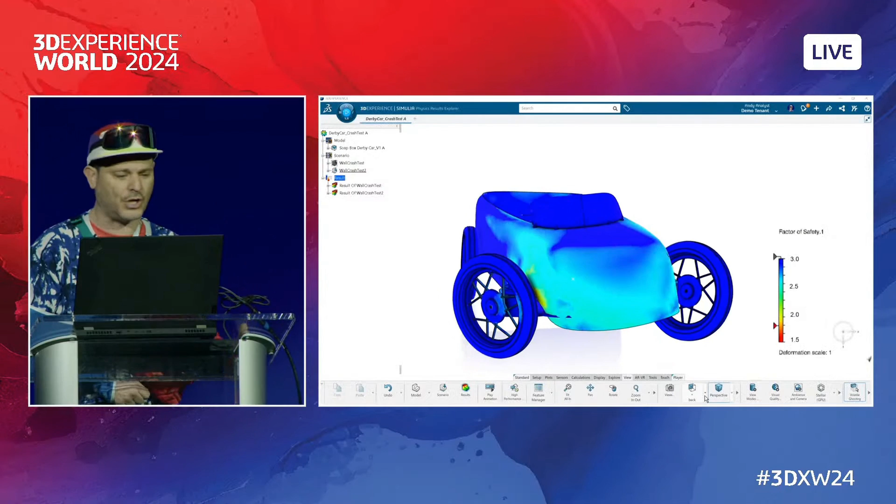From what I simulated, nothing predicted the crash response. The frame and my results, they were totally solid. Now, what did you mean were solid?

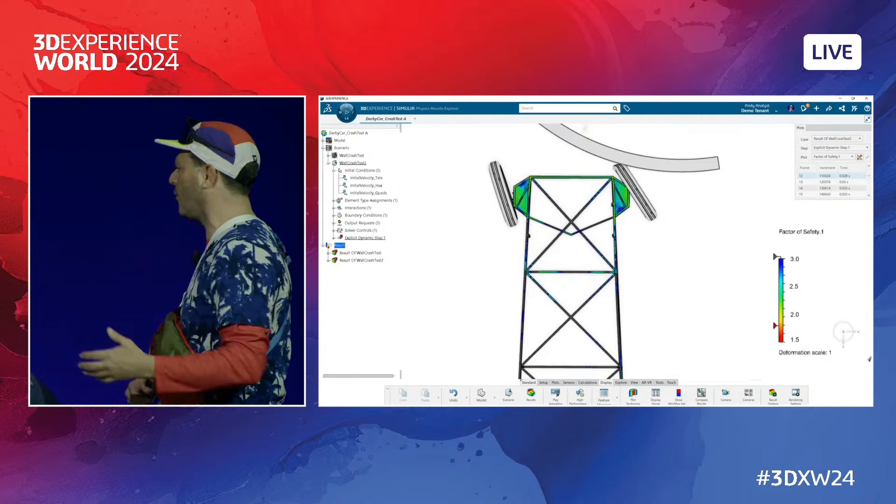Well, they were until Eric made that last-minute revision to the front end, and I didn't have time to run the studies all over again because my laptop is older than Eric's tie. I put in 6 IT requests for a new machine, and they denied them all 6 times.

But now, what about the cloud? Surely you got credits or tokens so you could use that solver. Oh, well, that's a great idea, and Mike was supposed to order some, but they never showed up.

Hold up. I was tasked with lightweighting the front end and making significant changes at the last minute. How could we not validate them? Now, son, hang on a second. You said significant and last minute. Now, Eric, that's never a good recipe for CAD casserole.

Not that I need Andy's validation, but let me just show you what I did. I remember it like it was yesterday.

This task says to lightweight the frame. I thought heavier cars were faster, but hey, I'm not the project manager here. 38 pounds, this is gonna be easy with SOLIDWORKS 2025.

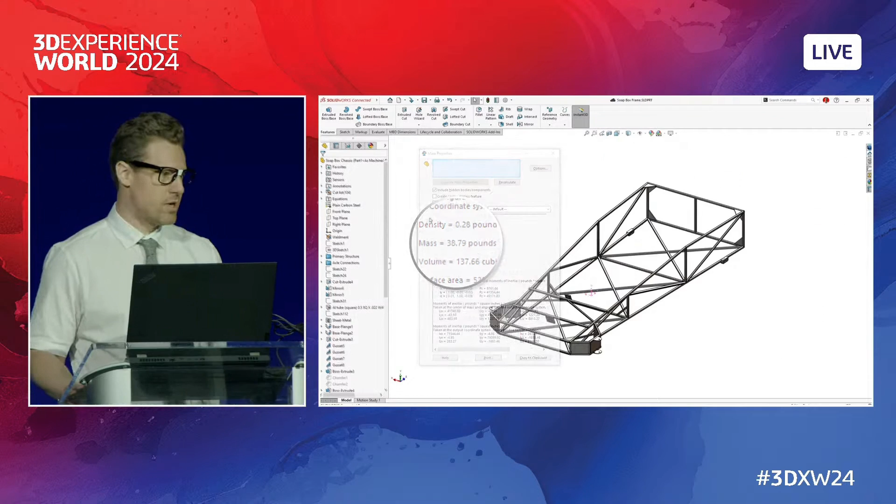I'll just drop in one of my favorite blocks on this plate, and I hate it when the sketch color matches the material. With 2025, I can change the color from the right-click menu. Now I can see it even without my glasses on.

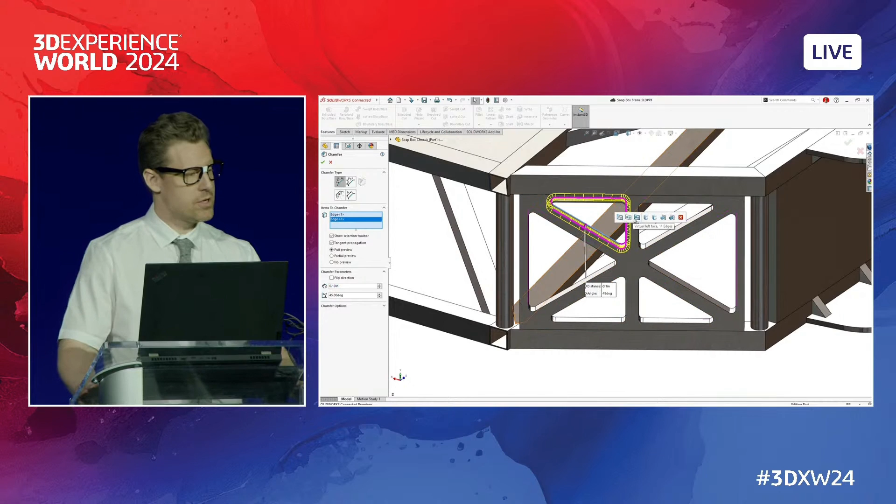This is a good start, but I can do better. In SOLIDWORKS 2025, the chamfer tool adopts the selection shortcuts from the fillet command. That was quick. Ouch, these sharp edges might injure Andy's delicate rock climbing legs.

In my new version of SOLIDWORKS, I can round them off, even though they are 2 separate bodies. Nice, bro. I'll use assembly visualization to check my work.

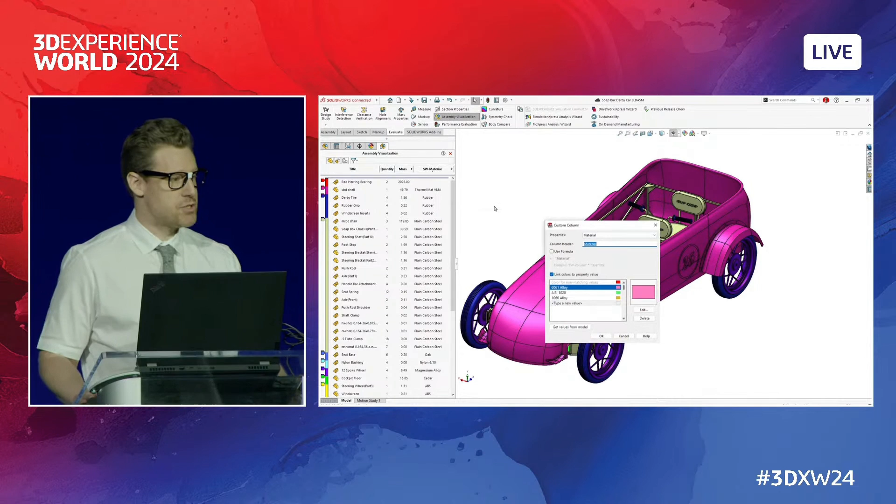In SOLIDWORKS 2025, I can assign specific colors, which makes it easy to see which components have no material applied. Sorting by mass, I can see that I've reduced the weight by 20%.

Now, what's that there at the top? It looks bigger than a Texas sunset. Wait an inch, pound second. This component is massive. I'll use the new roll-up feature in 2025 to isolate it.

Red herring bearing. Who did this? Mike, have you been in my metadata again?

Wow, that is a lot of drama. There is a lot of drama on this team, but also a lot of great demos. And we are going to see them again tomorrow for Act 2 of Splines Out. So I hope you'll be there.

Wise up, everybody. Whoa! 1 million views overnight of the Extrudo Cup fails coverage? Chad thanks you all. I saw Ben Lofton commented, what's up with the Extrudo stock price this morning? Up 10%? There goes all shorts.

Well, Ben, that's the power of social media, and that's the power of Chad. What's bad for MVP Corp might be good for Extrudo. Just take a look at those tickers.

And now, Eric, would you be able to use some of those fine SOLIDWORKS skills you're always talking about to help us investigate further? Sure, no problem, Rhaegar. That red herring bearing just doesn't make sense. Further proof that I'm being set up. And if someone has tampered with our car, it will definitely show up in the assembly drawing.

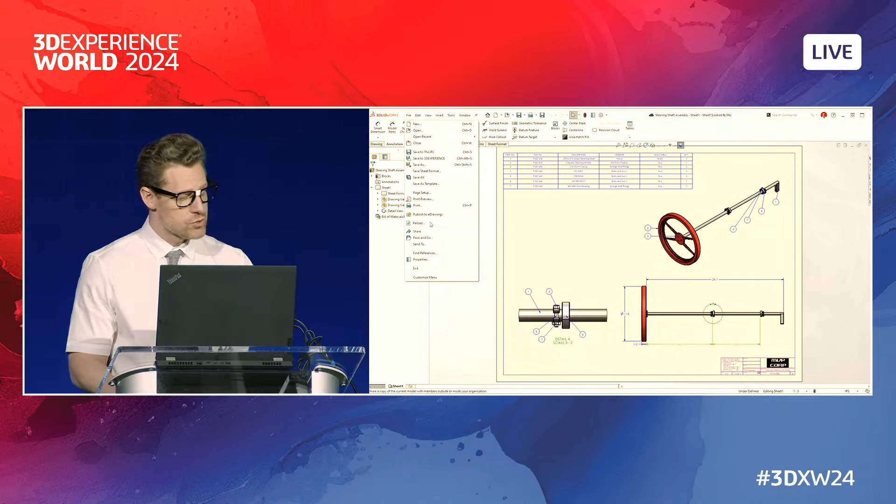Oh, dangling dimensions? Well, maybe a quick reload. SOLIDWORKS 2025 now offers the ability to reload a drawing document, just like with part and assembly files.

Okay, but that didn't solve these danglers. With 2025, this is no problem. You can highlight any dangling dimension and use the new automatic repair tool to reattach. This also works for sketches as well.

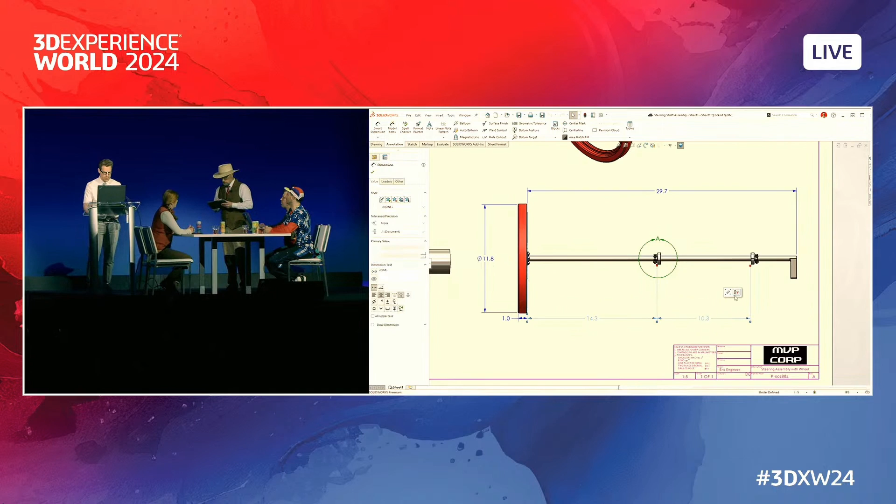Maybe this detail view will have some clues. Yes, this is interesting. A display state for a red herring bearing? There it is. Are these bearings reported in the BOM?

Let me check the reference configuration. No, this is wrong. No wonder we didn't see it before. Someone has definitely been tampering with this.

Check this out, Bernard. In 2025, you can now filter and organize your bill of materials by configuration and display states. As great as that capability is, this drawing smells really fishy to me.

So there are design changes by Eric, lack of validation by Andy, and a drastic update to the product structure by Mike. Suspicious, quite, but do any of these constitute intentional sabotage?

Who's ready to really ramp up this lunch and learn? Extrudo just released its holiday surplus pomegranate. I've got quantities. Anything but weld mint.

Ugh. Pomegranate? I suppose. Listen, Mike, adding that red herring bearing, that's one thing. Haha, right? But modifying the frame, that could have easily caused our crash. Yeah, and I definitely didn't run sim on that.

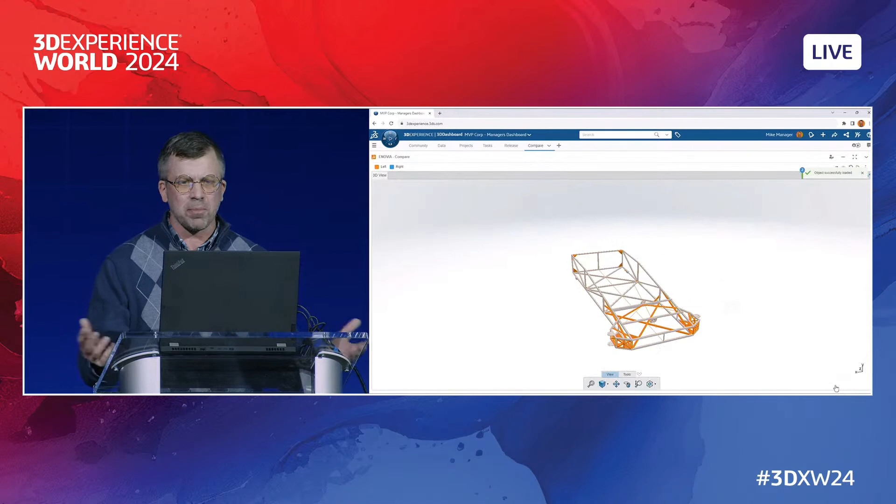Uh-oh, this doesn't make any sense. It's showing me as the owner, and I can't even remember the last time I actually opened SOLIDWORKS. No way I did this. All of the structural support on the front end has been completely undermined.

Eric, this is below par work. Definitely not approved. No way. That's not how I would have modeled that at all. Well, then, you wouldn't be opposed to showing us how you would model it then, would you?

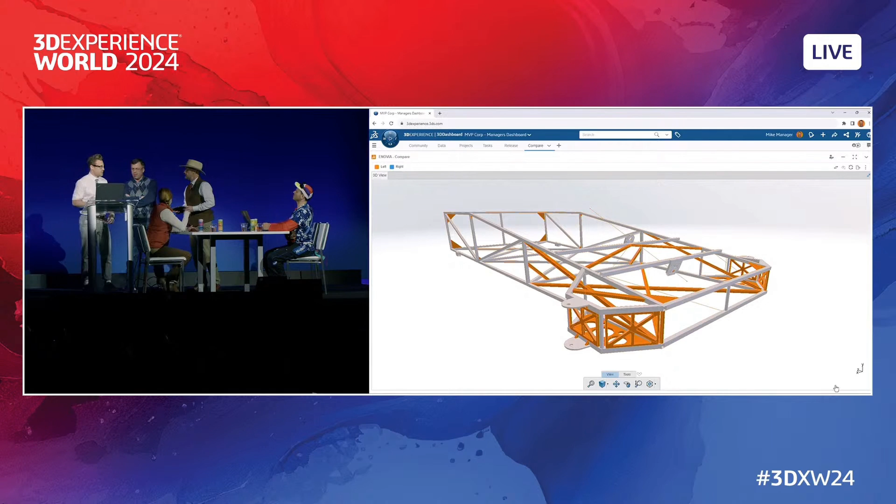I just so happen to have a branch with my superior design right here. Now, I prefer to use structure systems instead of weldments. It's easier to use and update. Instead of 3D sketches, I use simple solid and surface geometry, or even planes.

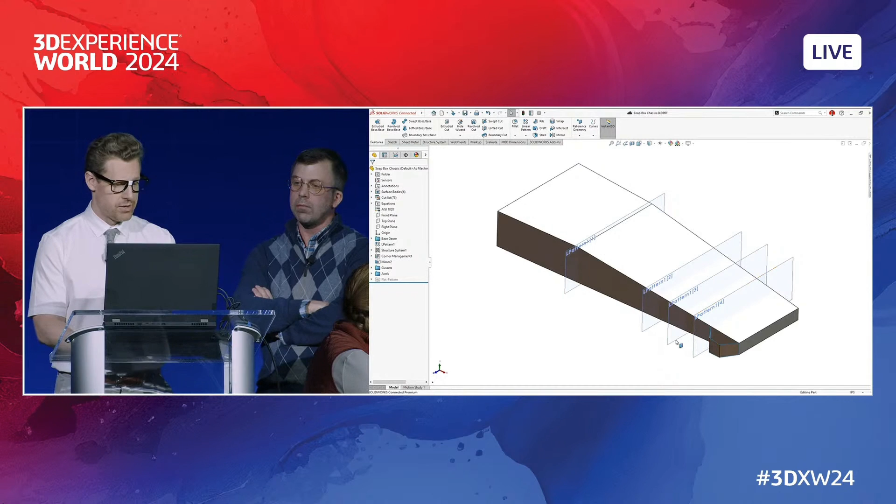You guys are all gonna love this. Setting up these planes was easy now that you can pattern planes and axes in 2025. Even better, you can now specify instances to vary as an offset from another instance rather than having to calculate the distance from the seed. That makes a lot more sense in this context.

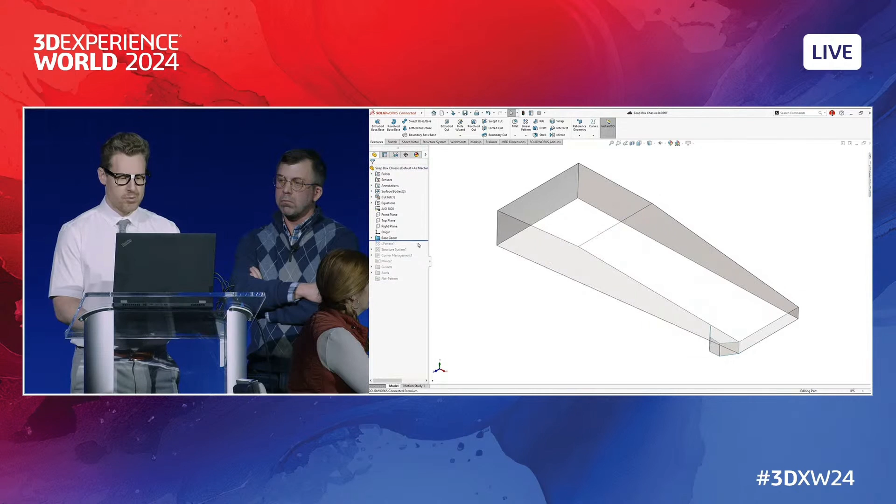And look at how clean this feature tree is. I started with my base geometry and used that to create the frame. I added some gussets for strength and a brand new front end design. There's still some work left to do, but I think this is a solid start.

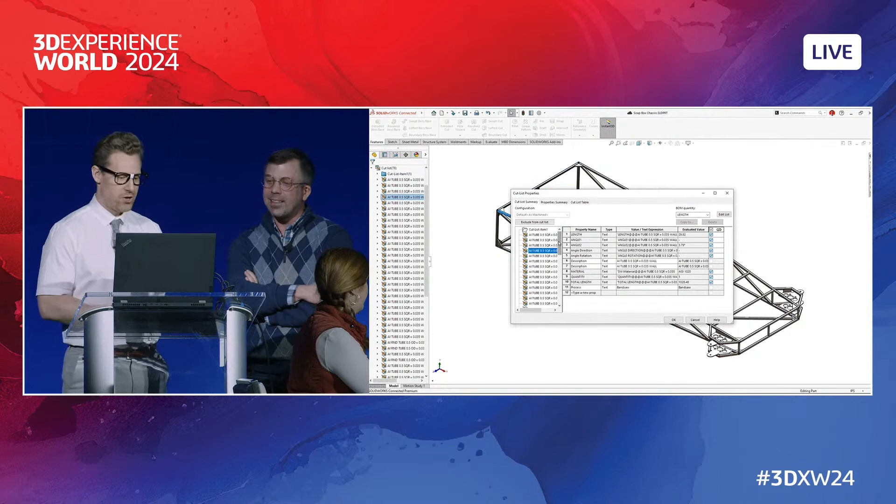Now, Mike, I know how much you love your properties. It seems obvious to me that these members are going to be cut on the bandsaw, but I'll add a property just for you. In SOLIDWORKS 2025, I really don't mind since copying cut list properties to all items is now possible. This saves a ton of time.

These sheet metal components aren't going to be cut on the bandsaw though, so let's change that for these 4 items with a quick overwrite. You got to give me mad props for that one, boss.

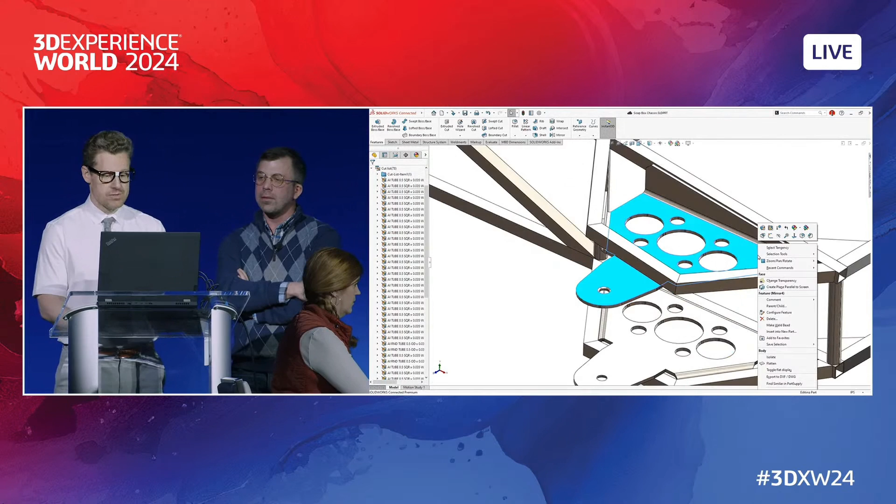This sheet metal part is almost complete, but I've been struggling to communicate my bend areas to the shop. Not anymore. With SOLIDWORKS 2025, I can add bend notches to the flat pattern, so it's easy for them to line up the part in the press brake.

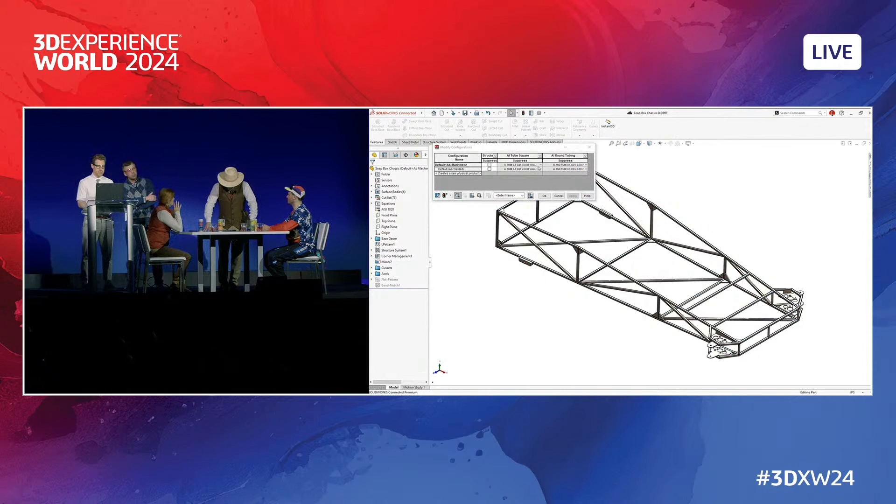And don't worry, Andy, I've got something for you too, and it just so happens to be my favorite feature in 2025 so far: the ability to configure the structure's profiles. This makes it a snap to create different variants for your FEA analysis. You won't need to rappel down from Analysis Mountain to bother us lowly designers anymore.

That is quite the speedy design work, Eric, but it's hard to tell just by looking if your new design is better or worse. Reynard, I got this.

Move. Dude, there's no way that your design would have survived, and I can prove it. Let's see if it can withstand what we throw at it using SOLIDWORKS simulation.

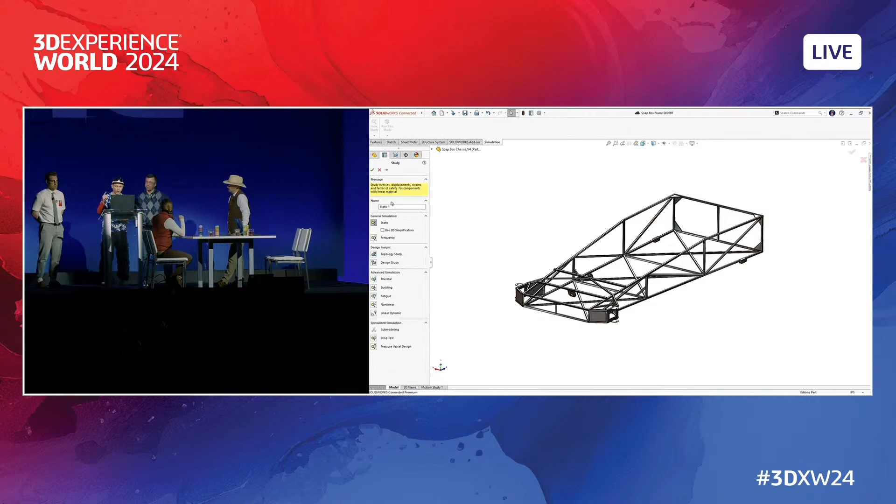I'll make this simple so even you can understand it. Notice how the structure system geometry automatically becomes a jointed beam model. First, I'll add some fixtures where the wheels and suspension meet the frame.

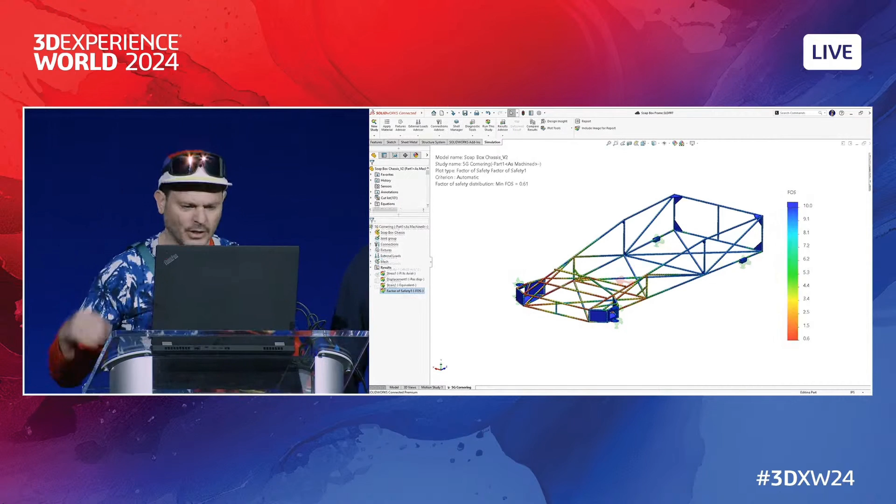And now for the loading. These are high performance machines, so they need to withstand 5 Gs of side loading when cornering. Now let's run this linear static analysis.

No way, that's even worse than I thought. Red is bad, Eric. Minimum factor of safety is 0.6. That's a total failure, bro.

You're still not convinced, huh? Okay, cool. Well, let's see how this thing responds to harmonic loading. To save time, I'll copy my study to a dynamic analysis. All my fixtures and connections go along for the ride.

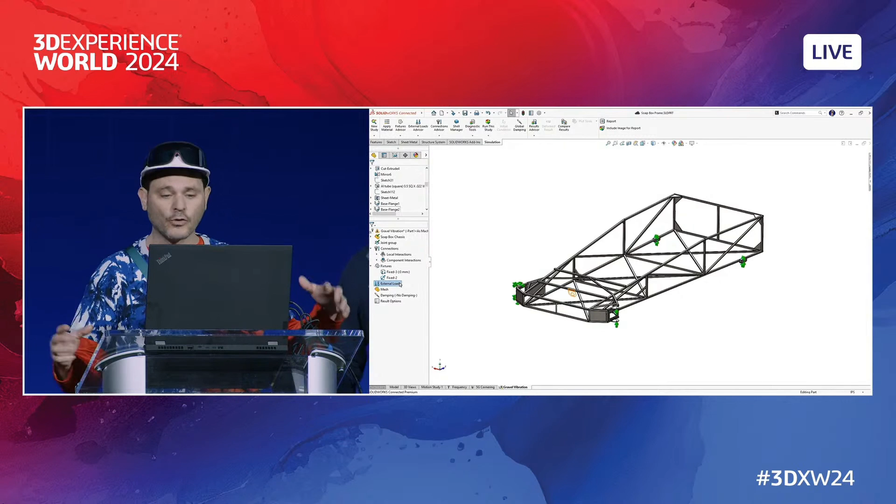Now to add a base excitation. Rolling over gravel at high speed creates vibrations typically between 50 and 100 hertz. And now, in Simulation 2025, I can specify those areas on the response spectrum. That means additional harmonic mode shapes right where I need them.

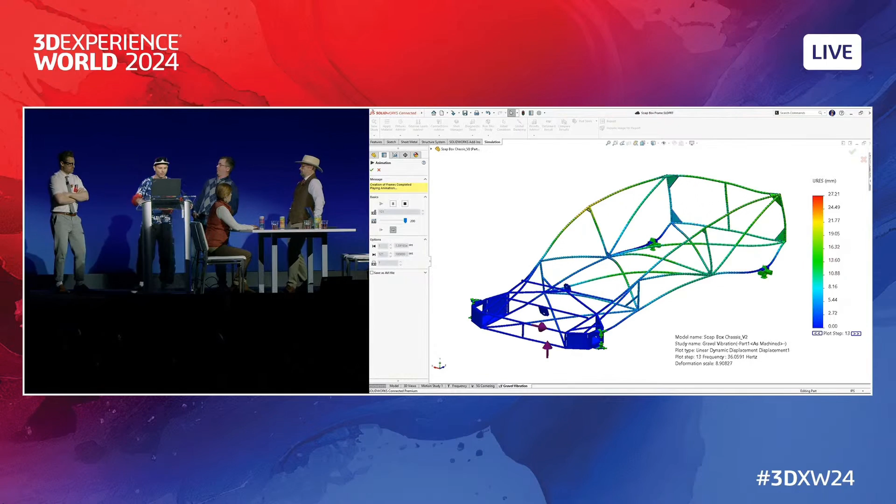Oh, well, look at that. It's Galloping Gertie. With that type of frame deflection, you'd lose all steering control. That's interesting, since that's exactly why we crashed. But we were totally thrown from this car, bro.

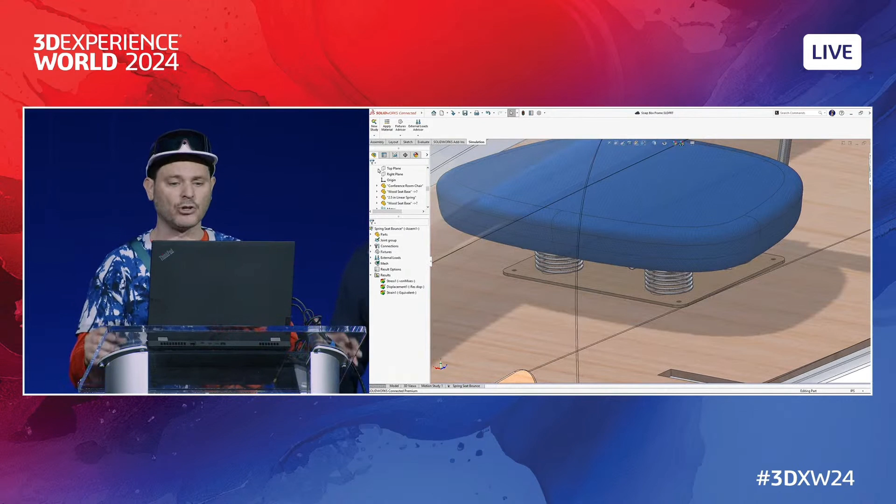From the harmonic response, we get a pretty good idea about what would happen to us if we were riding in it. All of the chairs are connected to the floor with springs. To accurately represent them, I'll use the new Abaqus-powered orthotropic spring connector. With Simulation 2025, not only can I control the axial stiffness, but also the directions of lateral, torsional, and bending stiffnesses as well. All right, and run.

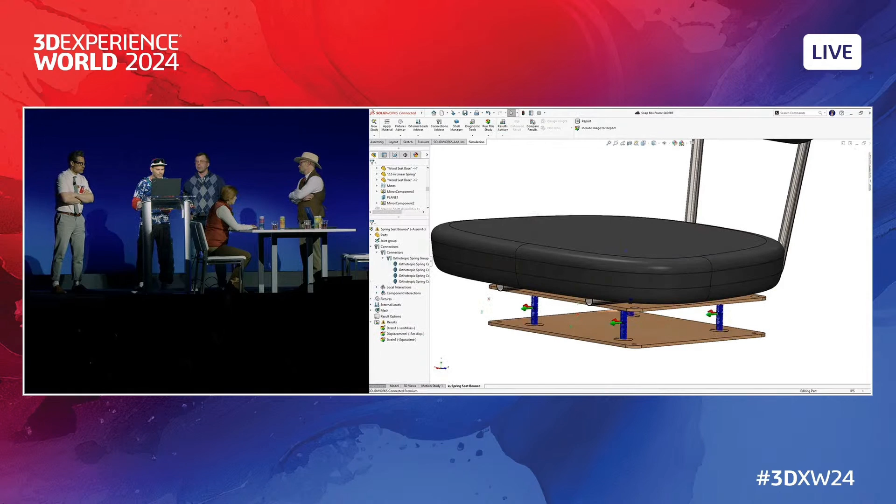Wow, your new frame turned our chairs into ejector seats, bro. And don't think I missed this result. The fundamental frequency corresponds exactly to my cornering speeds.

What's going on here, Eric? Have you been spying on me at the track too?

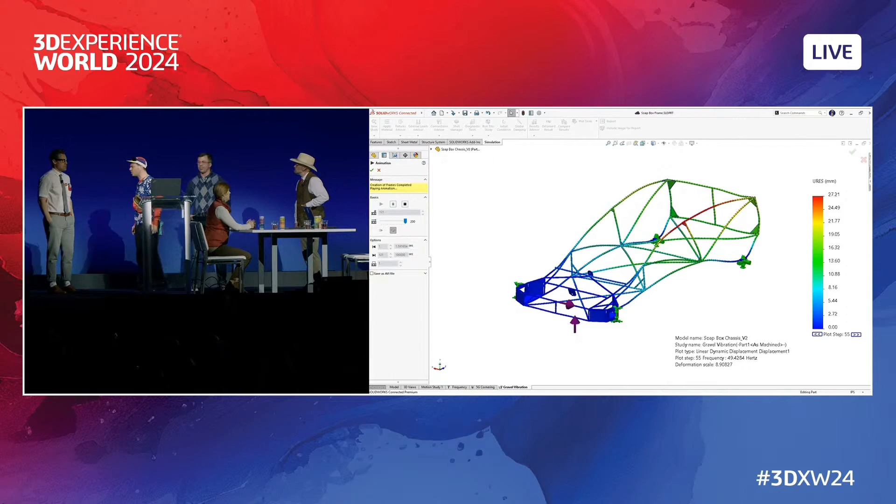The frequency has to be a coincidence. I can't imagine that anyone is down at the go-kart track meticulously clocking each of Andy's lap times. Well, I wouldn't be surprised if I did have a fan club, but regardless, whoever changed the frame, they're the ones responsible for sabotaging us and breaking my belay arm. Your arm is fine. Almost breaking my belay arm.

It still hurts. Okay, let's circle back. Whoever made the change to the primary structure assembly and the frame, well, it's got to be one of us. That change, as you call it, that's not at all what my feature tree looked like. It couldn't have been me.

Yes, but it is possible that you modeled it in such an amateur fashion so as to throw someone off the trail. Well, you know, it definitely wasn't me. I'm much more of a mesh and run what I get kind of dude.

You know, there's only 2 of us who have permissions to approve the final route stage to get it released. Maybe we're overthinking this. Someone, not saying who, got ambitious in his lightweighting and didn't rename his feature tree. Someone else released a new revision before, who could it be, that could resolve the backlog of geometry changes.

You know, Reynard, I think these are good lessons learned for the team as they get started on next year's car.

Brenda, a tempting conclusion that chalks this up as overhead of a typical team, but frankly, I think this team deserves a lot more credit for how proficiently they use SOLIDWORKS and 3D Experience.

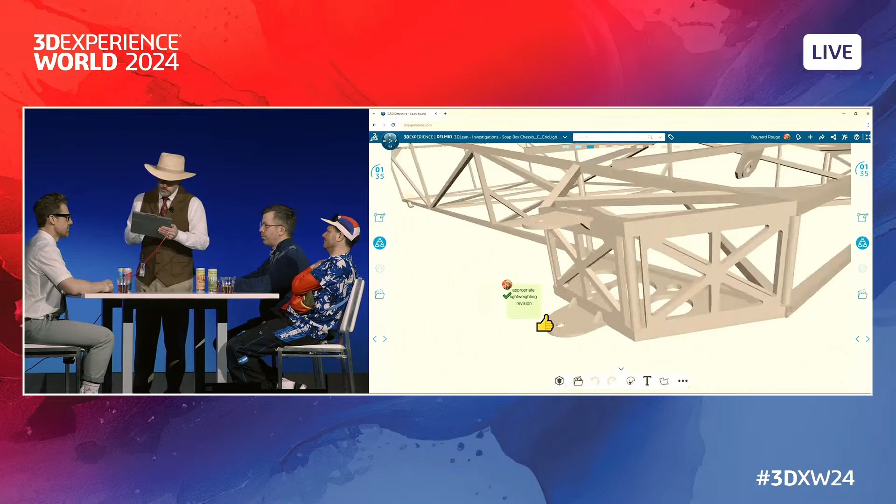Elk, we all agree your initial lightweighting into the front end is fine work. Did you go too far and undermine the structural integrity in another revision? I will say Elk certainly appears surprised by the crash. In fact, from the outside, the final car doesn't look sabotaged at all. Perhaps no one knew what he was stepping into on race day.

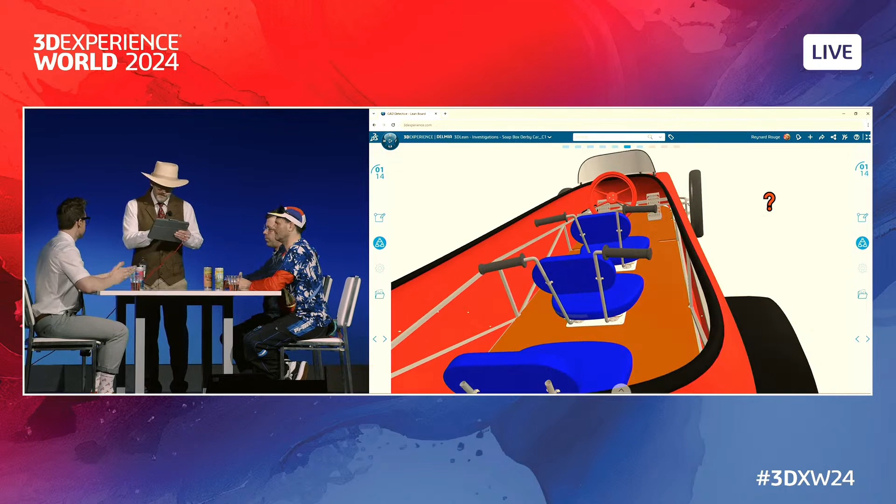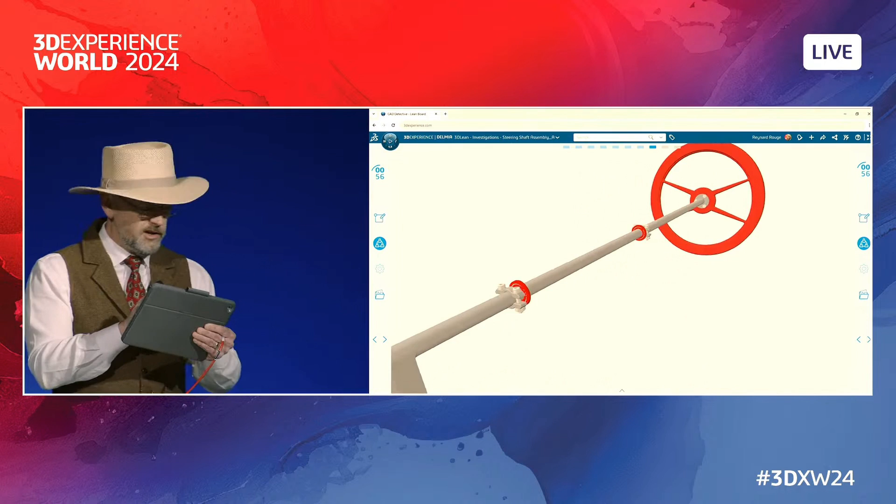Trying to outfox Reynard behind a thicket of branches and merges. Already, we have more problems here than a hunting dog has fleas, but let's just cut to the chase. Who changed the structure and who approved the release?

And what are we to make of this Extrudo stuff? This goes way beyond the crash at the Cup. And as always, these influencer channels, y'all been following Chad? He's speculating that MVP, Extrudo, and the masked billionaire are tied up in this all together. MB, one and the same as my employer.

If only we had more time. Alas, let's just bring this home and answer the most immediate question with the simple drag and drop of the product structure here to the place, and we're gonna...

Excuse me, sorry, Reynard, but this just arrived. It's virtually cold, carbonated, and still in beta. They gave me an entire keg of the new sweet and sour.

Sweet! Brenda's got the Extrudo R&D hookup. Does anyone know how to tap one of these? I'm the beta tester around here. No, I can handle it. I got this, bro, you just get the cups. I already... No, I want this. No, time out. I feel like... Freeze!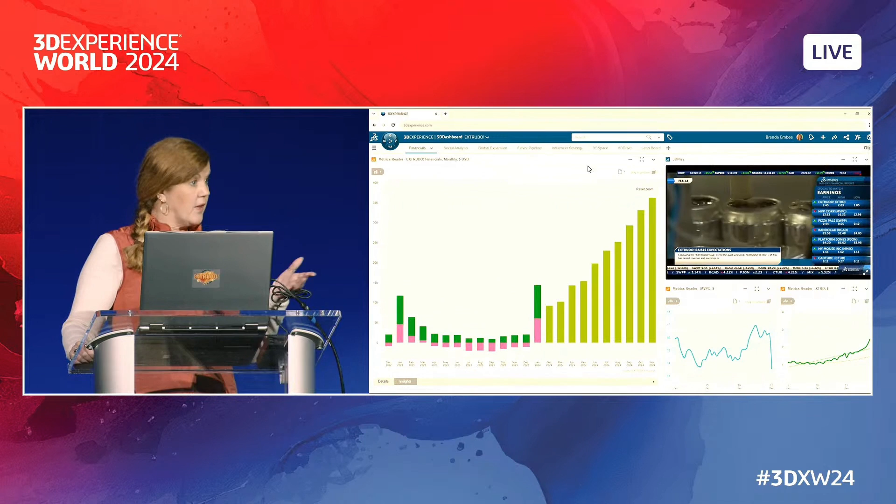There are tailwinds helping us here. Semi-sophisticated consumers, like you three, are tired of big beverage. Global sentiment on caffeine is at an all-time positive, and regions like Northern Europe are especially peppy right now.

In April, we're breaking ground in Belize. We'll be serving every designer around the globe and around the clock. With my factory layout already complete, there might even be enough room for quality control this time. But guys, seriously, this investigation is blocking my critical path to expansion, and I hate breaking a dependency.

How about the new flavors in our pipeline? Rainbow Crash - with flavor like this, we must be living in a simulation. Fillet Fruit Punch, a well-rounded and perfect finish to everything. Lemon Live, tart yet sweet. Sub Delight, sculpted around virtual oranges.

And what's the most critical component of a plan? Social media strategy. The Cup was always the focal point for this. We would get massive coverage of the brightest minds competing in a well-hydrated engineering nirvana.

But that's not how the real world works, is it? No, it was the video of the fails that went viral each year. Luckily, this did miracles for our brand awareness. And you three were always crowd favorites.

We've revamped our influencer program and signed channels like Crazy Cad Kevin, Sheet Metal Sharon. If you aren't following them, your kids probably are. And this year, we break out of the Danny Dozen Cans demographic. Soon, we'll be on tap in every client boardroom and reseller office across the globe.

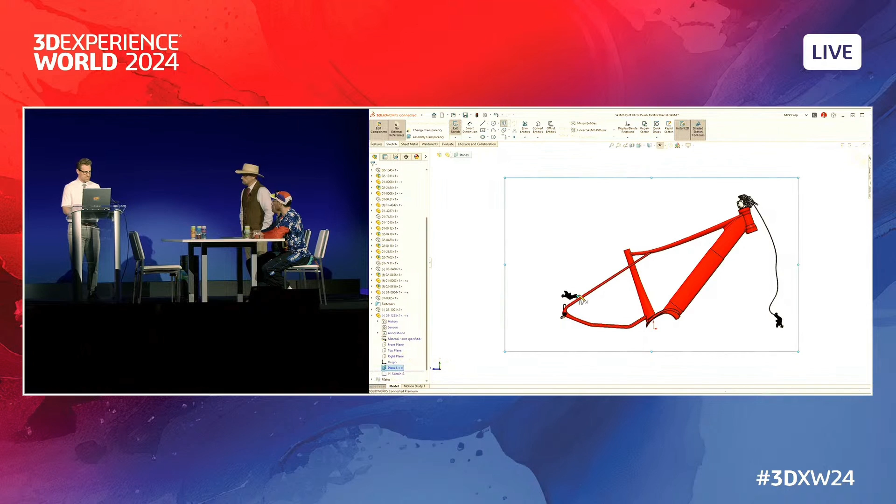This e-bike assembly needs to have an accurate representation of the hydraulic brake lines. In the past, starting with a 2D sketch would have left us with an inaccurate path and incomplete connections. Soon, users can convert 2D sketches to 3D with a simple click.

Modifying this path is even easier than before. The sketch triad can now be activated on spline points with a double click. This really streamlines positioning complex 3D splines.

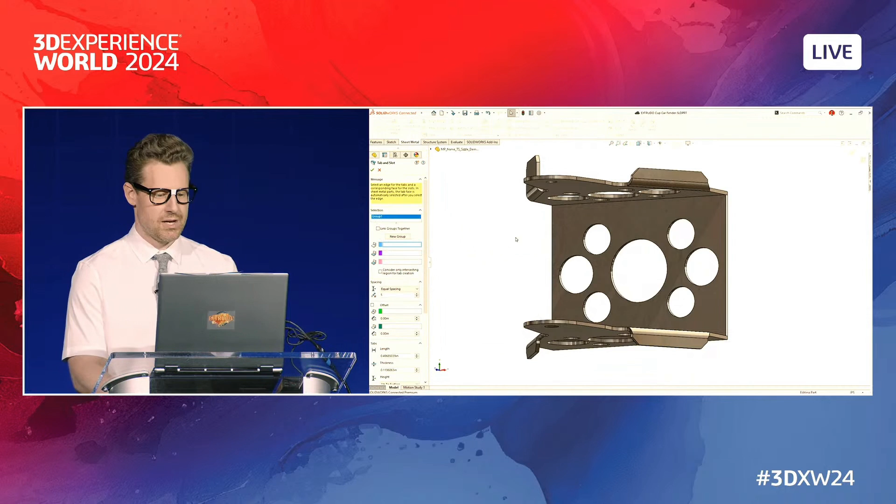Tab and slot design means more simplicity and precision for the shop. Not only is the UI simplified in 2025, but there's a new spacing option that will align your slots to the center of the edge, allowing you to build your tab and slot system from the inside out.

SOLIDWORKS has long offered multiple options for working with large assemblies. One that I use the most is Large Design Review, or LDR. In SOLIDWORKS 2025, more capabilities are available when using LDR, for example, breadcrumb navigation, which makes it super fast to pick the right component.

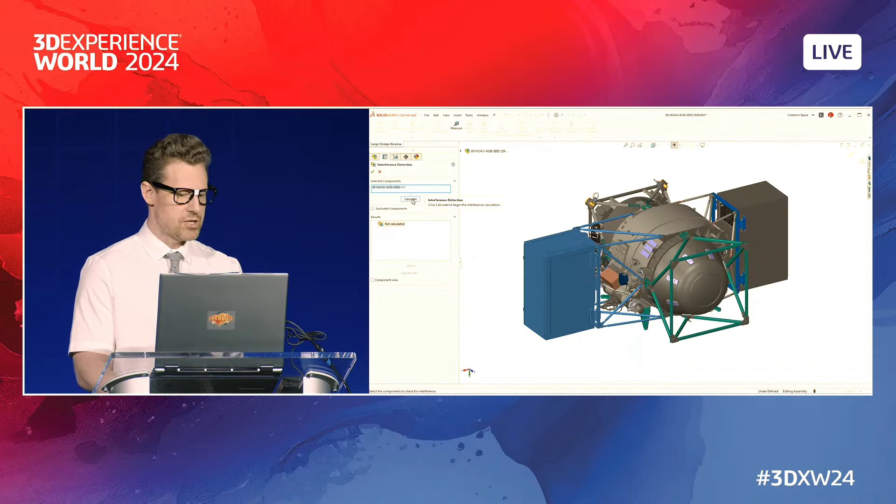2025 expands LDR further. How about we run an interference detection to scan for overlaps? I've pre-selected a subassembly to run the check. Sure enough, there is an issue with the electrical cabinet and its structure. I'll have to investigate this a bit more.

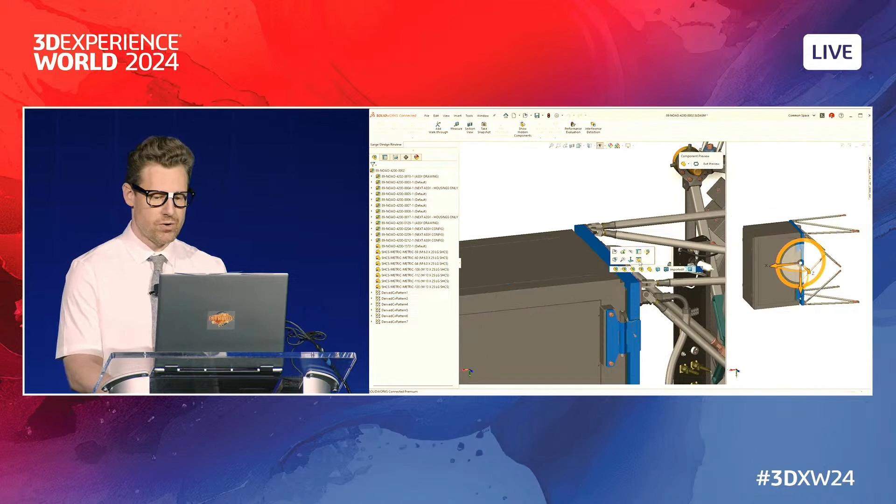Now, in 2025, LDR also supports the use of component preview. This is a side window that gives you a second view to help inspect and modify your design. Here, we can see the issue is with a misaligned hinge bracket.

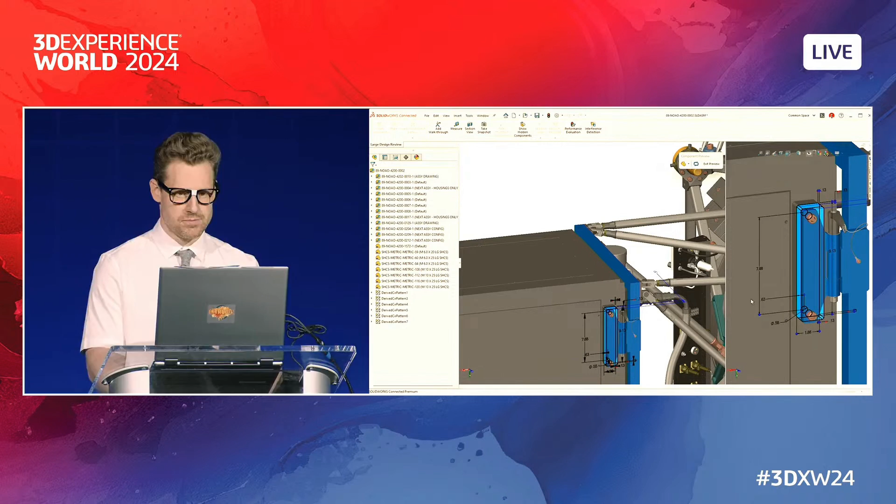No problem for SOLIDWORKS 2025, since in-context edits are available when working in LDR. Editing this part in its underlying sketch is all that's needed to shift the geometry into place. Ah, this looks good. With the changes made, a quick rerun of the interference detection shows the issue has been resolved. If you aren't using LDR almost all the time, you will be with SOLIDWORKS 2025.

Now, let's review some of the great enhancements we saw this week in Dallas. Keep in mind, the development team is hard at work on many more coming throughout this year with each service pack release. I really can't wait for the right mouse menu so I can easily modify my sketch colors.

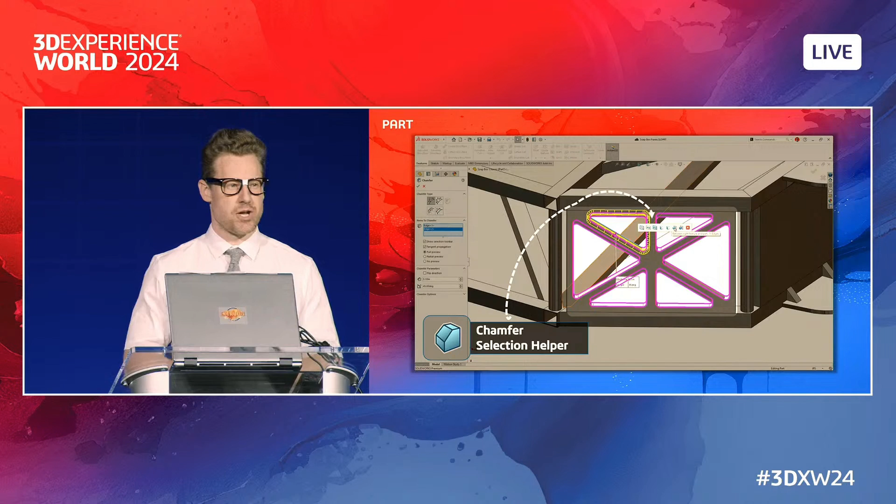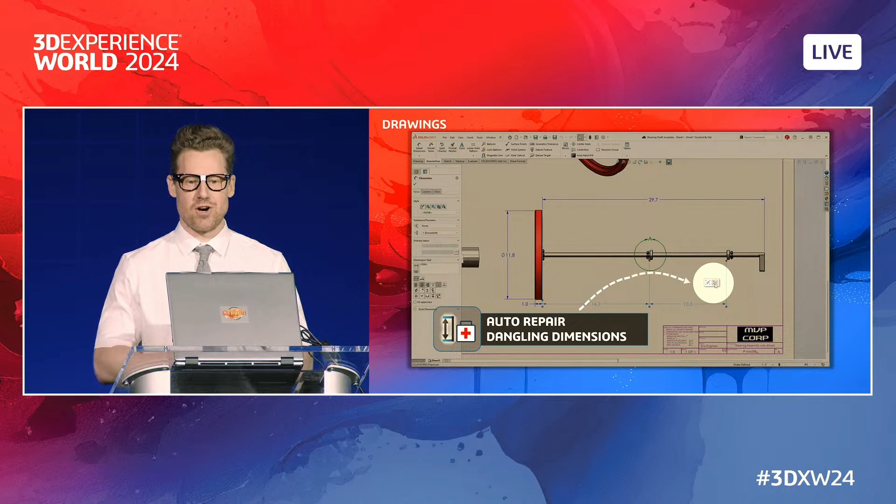Fillets will support multi-body selections. Chamfer selections will include the selection helper. Assembly visualization introduces a roll to here shortcut and adds support for additional property colors. Drawing files will be reloaded on the fly, and dangling dimensions in drawings and sketches can now be automatically repaired.

Bills of materials will offer the option to be filtered by display state. Linear patterns will support planes and axes. Structure system profiles will be configurable. Properties will be more easily copied through cut lists. Sheet metal will introduce bend notches. Simulation Premium will allow users to target specific harmonics in dynamic studies, and adds a new orthotropic spring connection.

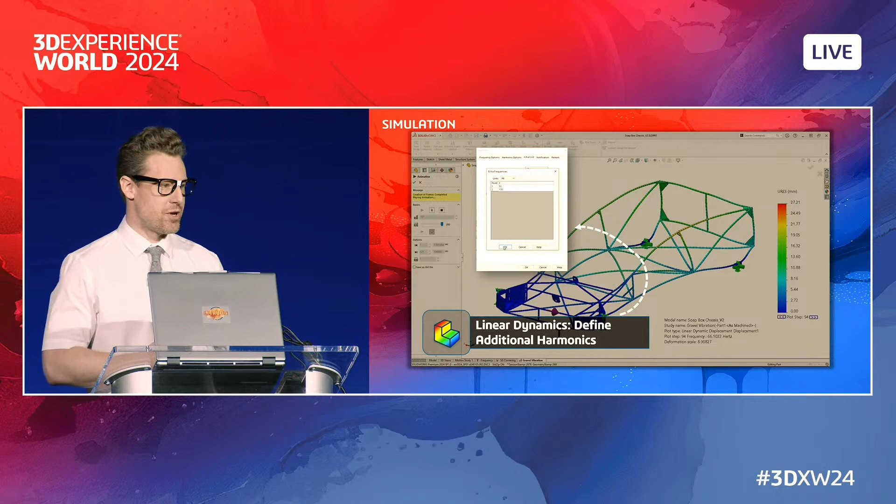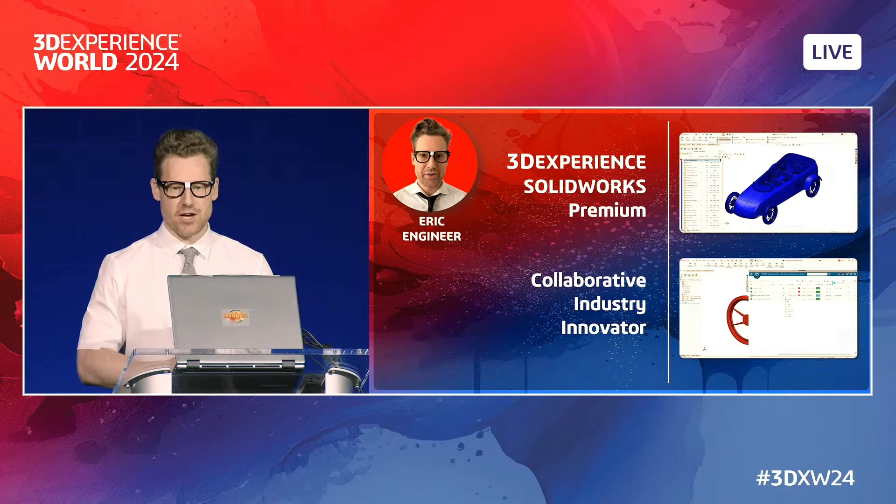Finally, in case you haven't been taking notes, let's recap some of the 3D Experience Works roles the team used this week. I've really started to find a hankering for Boolean Blast, and through the demo, I primarily used 3D Experience SolidWorks and Collaborative Industry Innovator to keep everything organized. Exactly what you have with SolidWorks and cloud services.

Mike, the manager, has fallen in love with pomegranate and keeps an extra jug in frozen state in his desk drawer. Throughout his work week, he relies on Product Release Engineer and Collaborative Industry Innovator. Andy's rock climbing pack is full of Rainbow Crash that he stole from the Extrudo R&D lab. To get his job done, he relies on Structural Mechanics Engineer when the going gets tough, and of course, SolidWorks Simulation Premium.

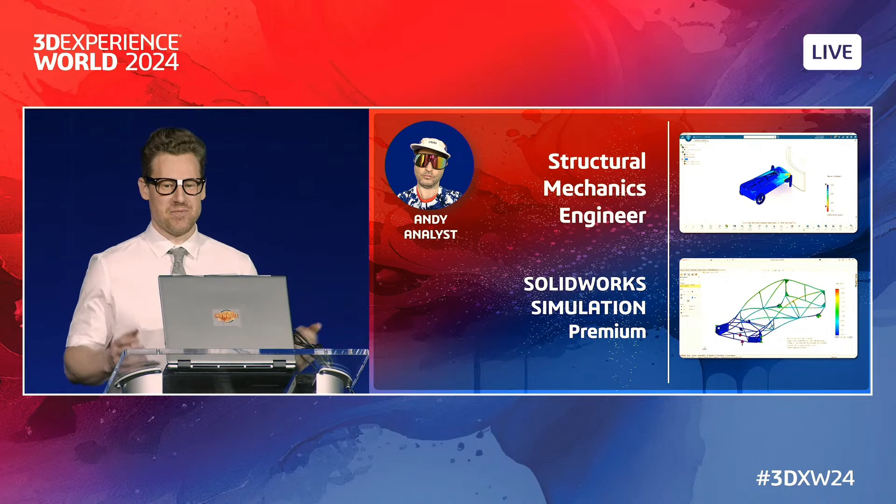Reynard Rouge keeps his thirst quenched with a cold, sweet feature tea, fitting for a Southerner. Throughout the week, he kept track of all of these clues with Lean Team Player.

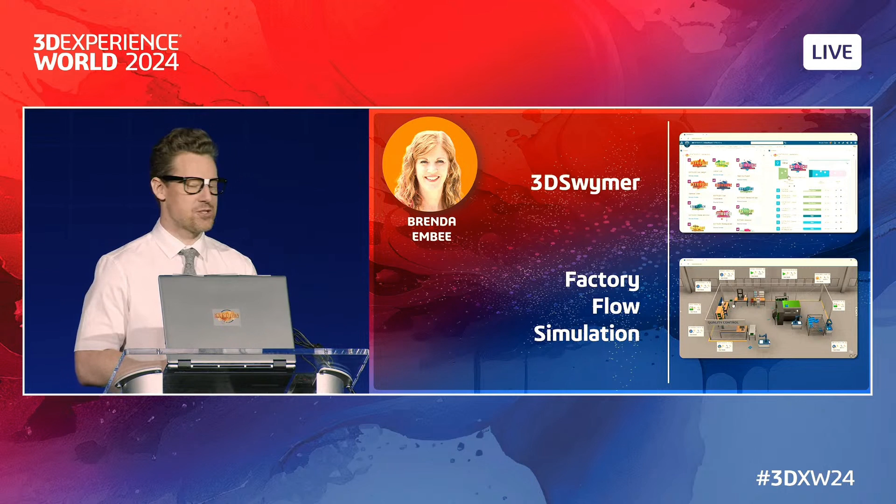Brenda loves the kick of extra strength over constrained. To keep her creativity flowing, she leverages 3DSwymer. On the production side, factory flow simulation is helping her take over the world one Extrudo can at a time. Without Project Planner and Social Business Analyst, Brenda would have struggled to keep her scheme on track.

All right, finally, remember team, let's keep our SolidWorks updated throughout the year so we can all use the new capabilities together. Whew, these demos are making me thirsty.

I think maybe you should stick to water. Great job. Well done, everybody. Woo!